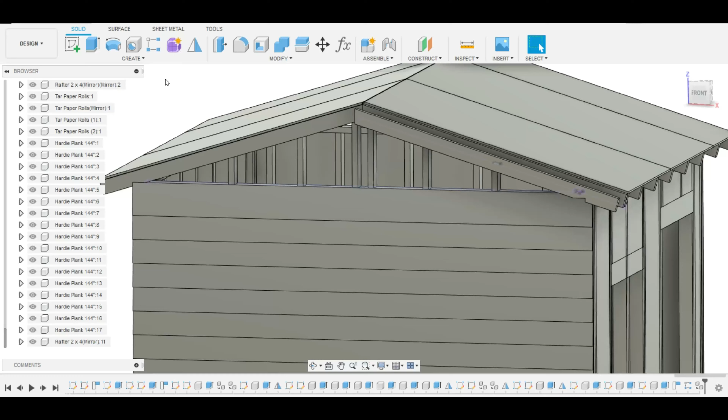Let's make a shop or shed, because why not?

All right, getting right into it. That is my parameters you just saw, and we should go back to them in a minute, I believe, on this first part one video.

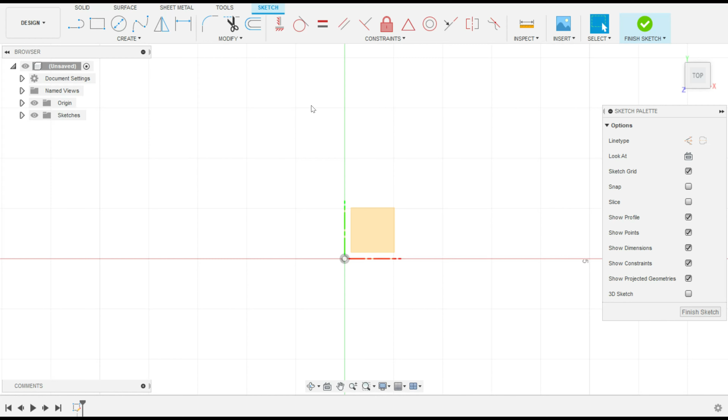You don't have to use parametric modeling. Again, I just find it to be helpful, and I think on this one I ended up not really using it to its full extent. I just didn't see the need for it because this was going to be a one-off. This was not going to be something that I needed to make several different types.

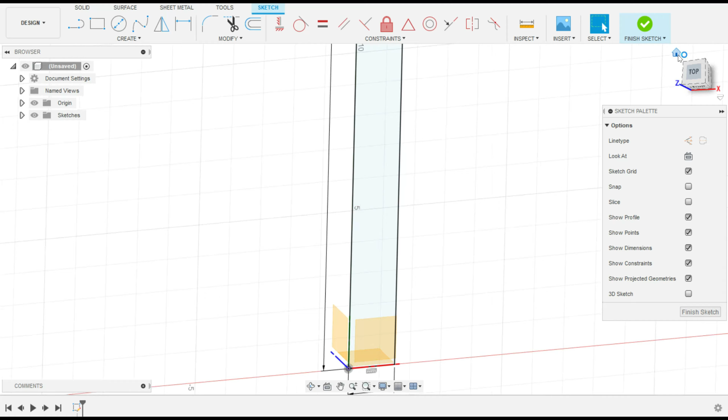But say you want to make some templates or drawings for people, you can do this with parametric modeling. And that way, if someone wants a 12 by 12 or 12 by 20 in lieu of a 10 by 10, 10 by 12, then you can easily adjust the parameters to change everything on the drawing.

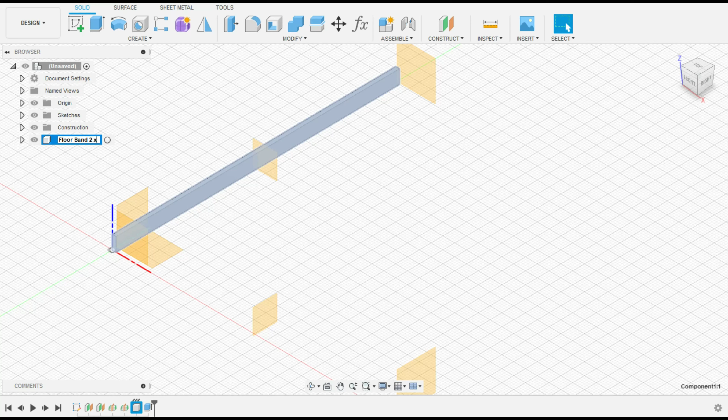But anyway, moving right into it, I do have a parameter set for concrete blocks for this one. I am not going to draw in. You can do like skids, 4x4 skids if you want, or you could pour a slab. I just, in my mind, would envision this having just some patio concrete blocks for this to set on. So that's why you're not really seeing anything but the 2x6 base.

Banding right here. So anyway, and you're going to want to use treated wood on this, if you're wondering. And because you can see on the left there, I'm actually spelling out the types of material.

And the reason I'm doing that is because whenever you go to print the drawings for this, and when you print out the material list, which it will do as well, obviously, in Fusion 360, you're going to want to know what that material was. Otherwise, it'll just say pier, or it'll just say band, floor band, instead of 2x6.

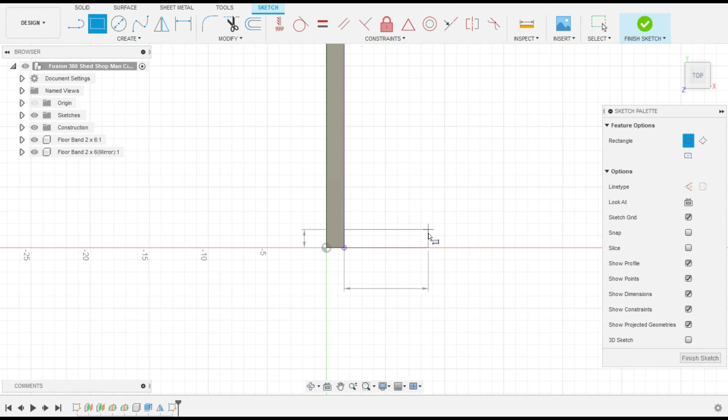So you ideally want to do that ahead. You can always change that later. It's not a big deal if you're in a rush. You can just shoot out components. As long as everything is a component and not a body, you'll be fine.

But anyway, this is kind of how I start off doing a shop or shed design. I start obviously with the bottom foundation for it, the floor joist, and move forward on it.

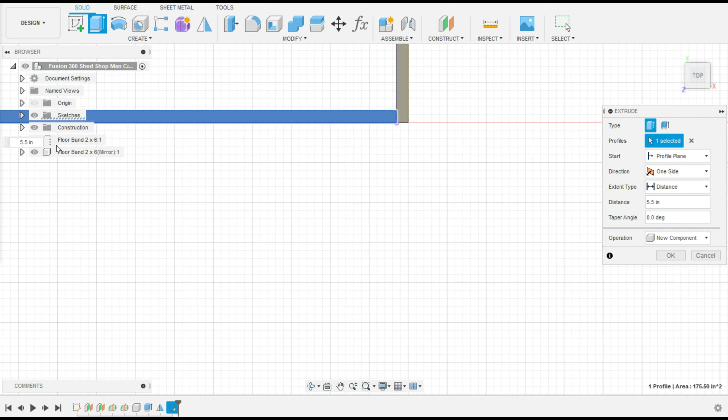Again, you're going to want to use your offset and midplanes through the construction tab, which you will see me do in just a second here. That way you can easily mirror any of the material.

And as you've seen before in my videos, when you mirror, as you'll see now as well, the component that was mirrored will simply show up as a mirror of the other item, as it should, and there you have it, and you'll see it on the material list the same way.

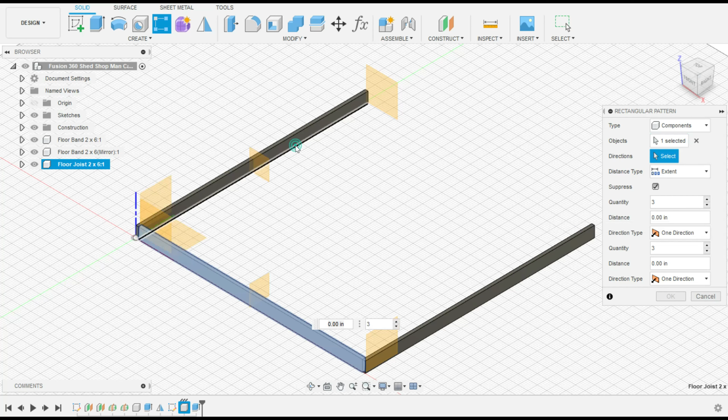That way you don't have to go back and name 60 joists. They'll individually populate on their own in Fusion 360 whenever you use the mirroring function, or when you do the pattern on path, pattern on rectangle, same thing, which is what you're seeing here.

And again, I don't do pattern on path unless I'm doing leatherworking. It's just a different technique that works better in leatherworking. In woodworking, I use the rectangular pattern.

And again, you just pick, as you saw, you pick the direction, and then you start picking the quantities that you feel you will need.

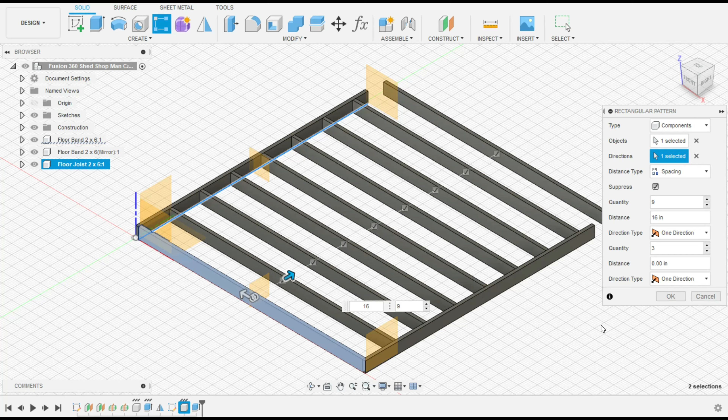Based on either spacing. In this case, I believe I was going to go with 16-inch on center, or you could do extent. Now, you'll see in a minute here, I'm going to switch over to extent in lieu of the spacing. And that just gives you the capability of adjusting or tweaking what you did.

So I have 16 on center, but when I switch over to extent, I'm going to be able to manipulate where these are a little bit easier. The problem with that is you're going to lose in this carpentry, you're going to lose the 16-inch on center.

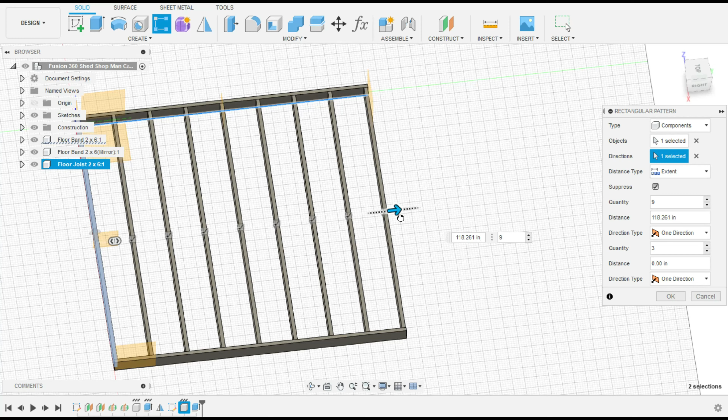So I think what I decided to do here is just add an entirely new 2x6 floor joist because I was starting to lose my 16-inch on center.

Yeah, and I guess I clipped that part of the video out, but I did go back and add that additional floor joist there at the end so I could maintain the 16-inch on center, which is not a big deal.

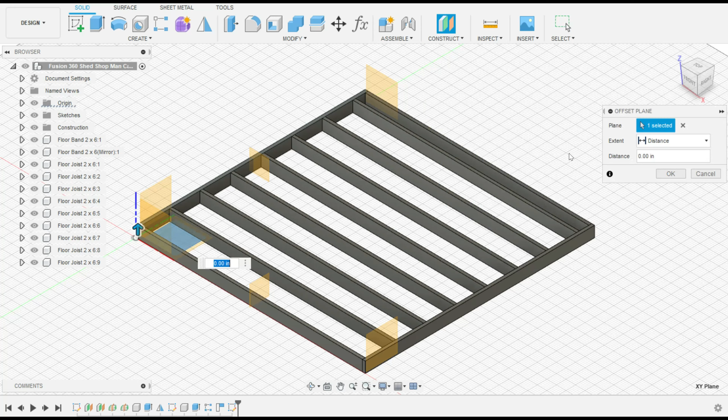I just wanted to get the quantity of lumber at the end where it needed to be, so I didn't want to be short 2x6s on this build, so I added one in there so that I would have the spacing that I needed no matter what.

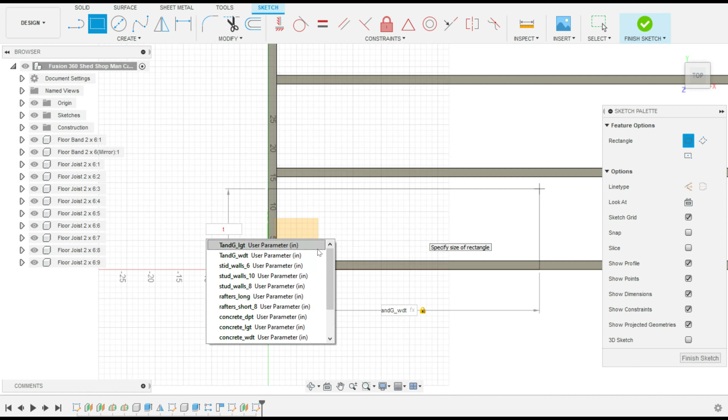So right here, I'm obviously putting in the subfloor, which is the 3/4 inch tongue and groove. And I believe I even spell out, yeah, tongue and groove.

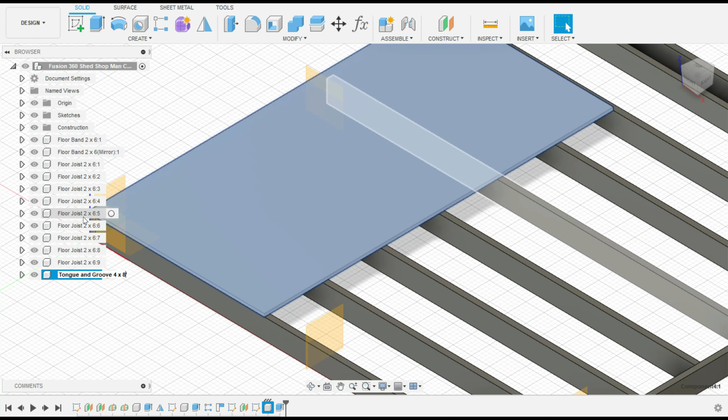Again, like I said earlier, you're really going to want to spell out the material. That way you know, or the customer knows, if you print off the material list and or drawings at the end, they're going to know that they need to get.

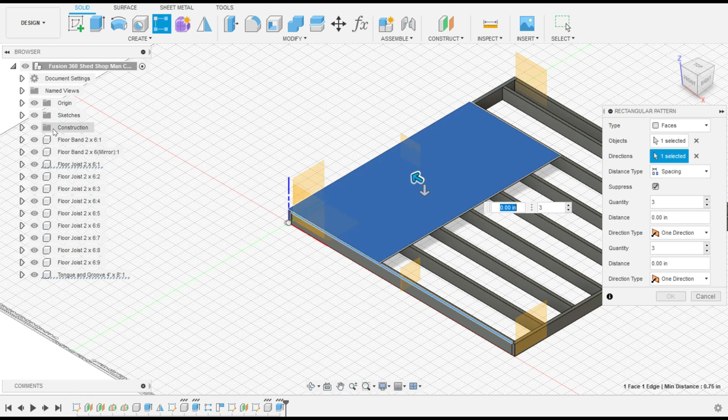Okay, for this, obviously you're not going to be able to get the full amount of 4x8s to span the entire floor joist here, which is what you're seeing.

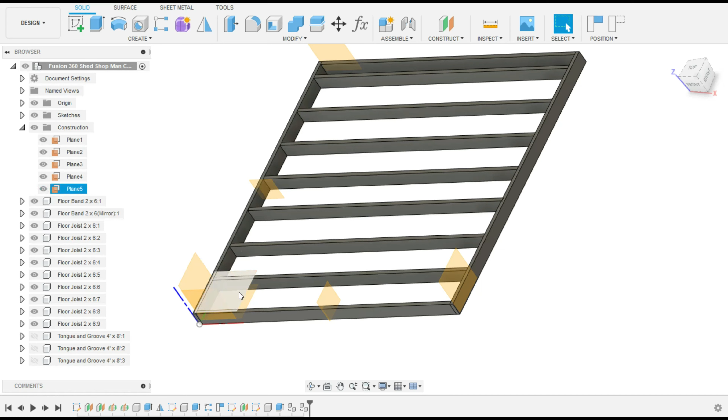So what you're going to want to do is get at least the coverage you need. That way, whenever the component is created on the left, you'll know that you still need to get an extra piece of 4x8 tongue and groove for that portion of the build.

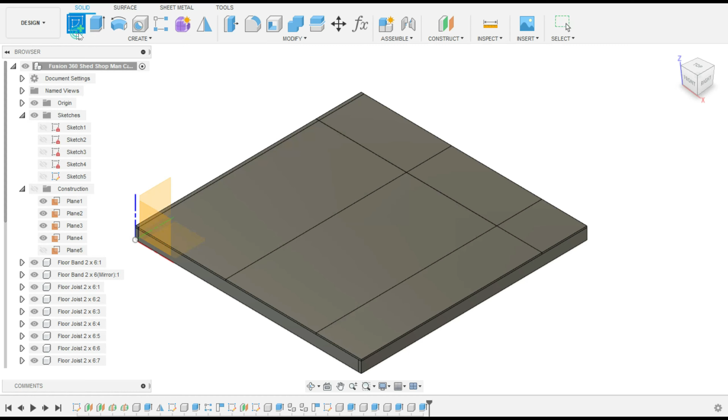Okay, once the subfloor is complete, you're going to want to start working on the wall studs. I did have a parametric setting for the studs, but I don't know that I stuck with it. I believe I went with 8-foot high walls on this one.

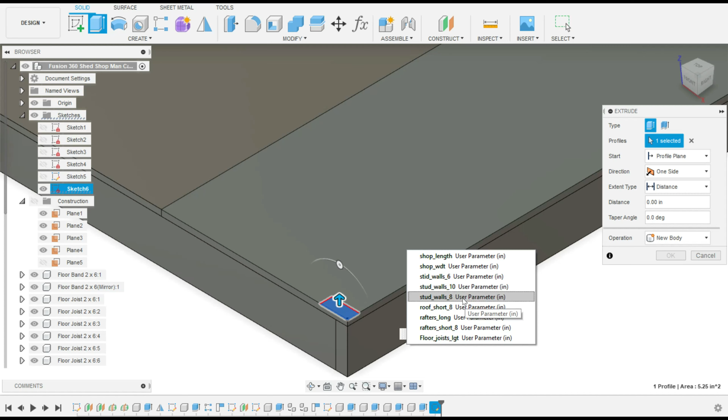I was going to go with a lean-to type shed because it's a lot simpler in the field building and designing, since you don't have to deal with a lot of the roofing, which can be tricky. But I made it more complicated and went with a pitched roof so you could apply composite shingles in lieu of maybe an R panel roof. It's more knowledge using Fusion 360 for the more complicated type of roof.

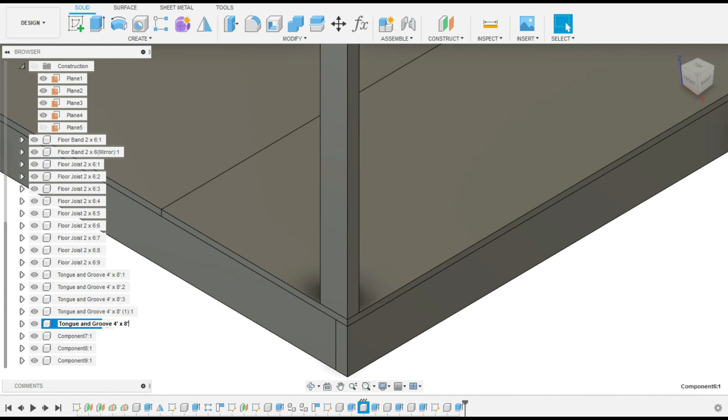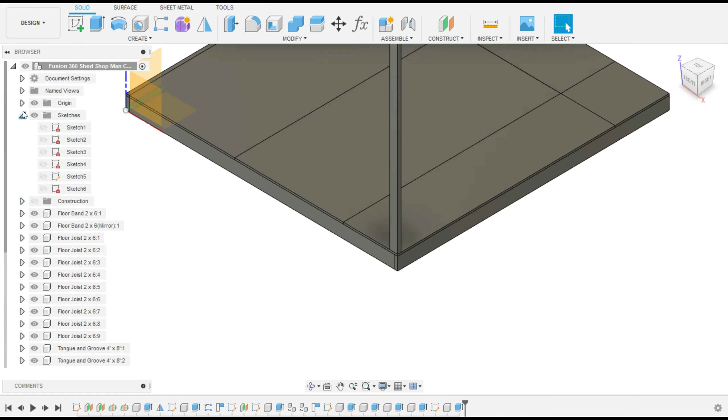So I'm laying out the studs here. You need to make sure that you are touching the top of the tongue and groove subfloor, because if you remove the components and hide them and work off the bottom sketch, your stud is going to start underneath where the 2x6 floor joists are, and you don't want that. You want it to start on top.

Something I didn't do here, which I didn't catch until later, is you actually need to put down a 2x4 bottom plate along the perimeter walls and then put the studs on top. I would probably go back and add those in, for sure, if I was going to sell this or give it to someone to build their own shed, because they need to know that you need the bottom plate, the horizontal 2x4 along the bottom of the wall studs, as well as the top header plate, which I did add. But if you don't have the bottom plate, it's kind of pointless.

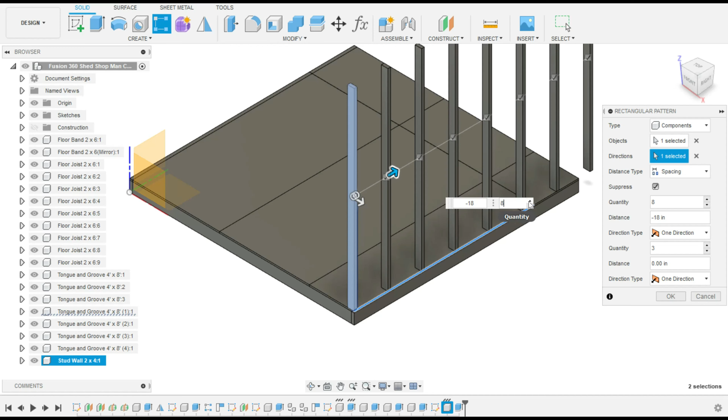So for those that watch this and see that I don't have that, I do know that. Given the amount of time to get these videos out, I wanted to keep moving forward and not go back and edit that particular item.

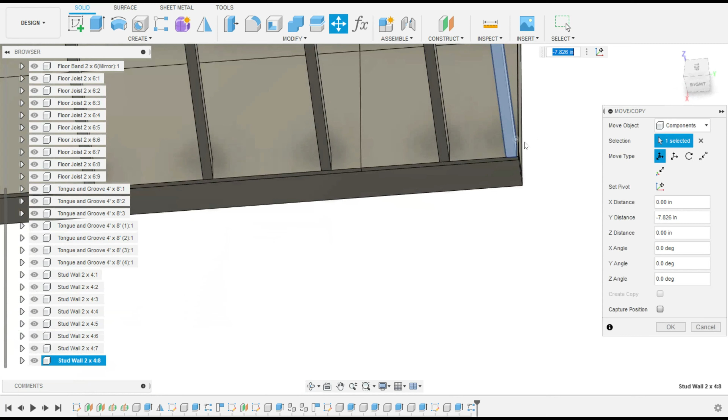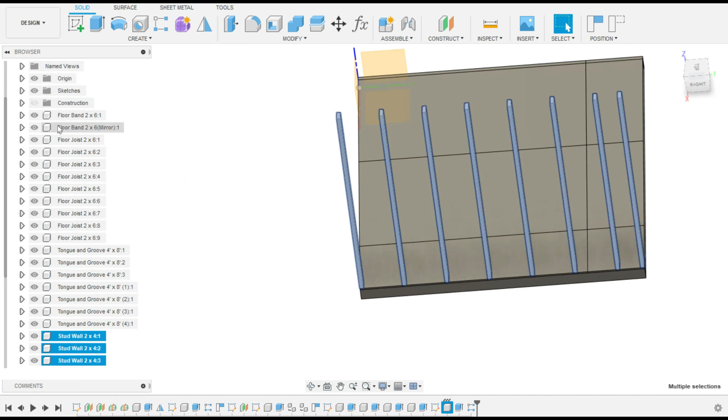But anyway, you can use a rectangular pattern to get these quickly out to the distance you want. Then once you're done using the spacing feature on rectangular pattern, you can switch it over to extent and tweak these around. Or you can individually click on, like I just did, the very last stud, right click if you're using a mouse, hold that component, then click to move it in place to where you want it to sit. So a lot of different ways to do that in Fusion 360.

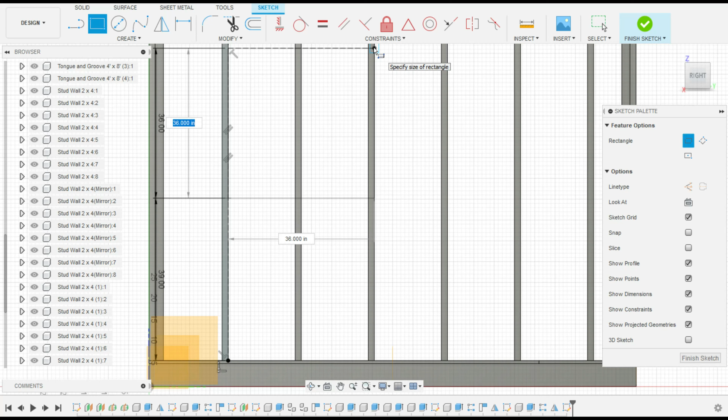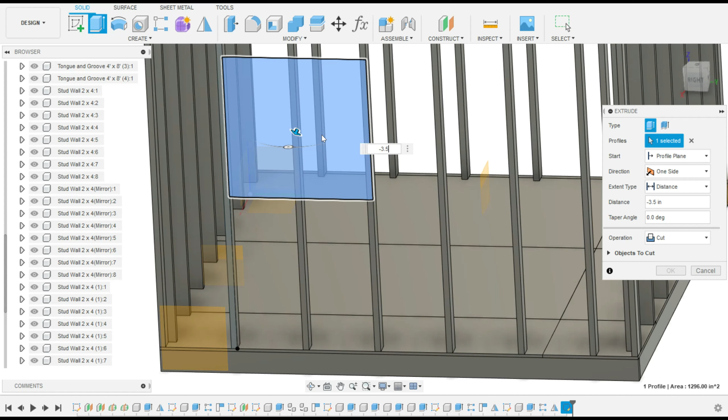What I'm doing here is just adding in where my window will go. This is also a good education for those wanting to learn Fusion 360, because if you remember, all of these were essentially mirrored or copied, so they all changed when I did my cut through for the window, which is exactly what you do not want because they're all tied together.

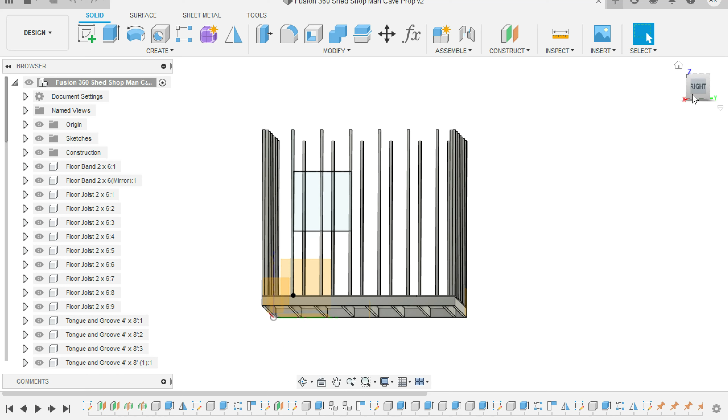Now, there probably is a way to isolate the components you want to work with. I don't remember how to do it, to be honest, and I haven't had to use it lately. For sure I have not. So there is a workaround, which I think is how I learned to do it, and I think a lot of people end up doing anyway, so I don't think there's a quicker fix in Fusion 360 that I know of.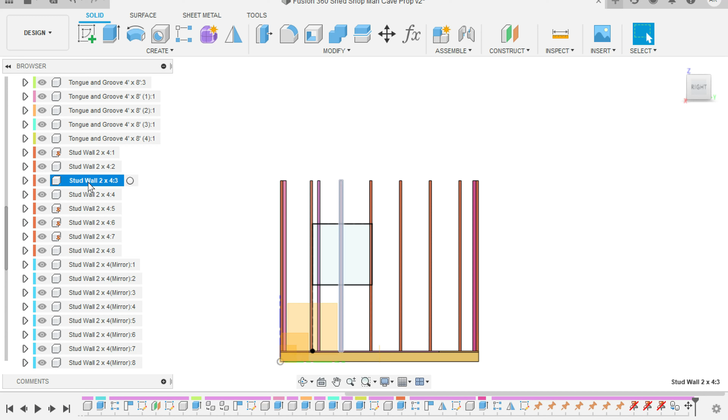You basically have to go in here and copy the studs, in this case where the window is going to be, create new ones, and then go back and hide the ones you don't need whenever you perform the cut. That way it isolates them a different way, so you can make the openings, the window and the door in this case, on this particular build.

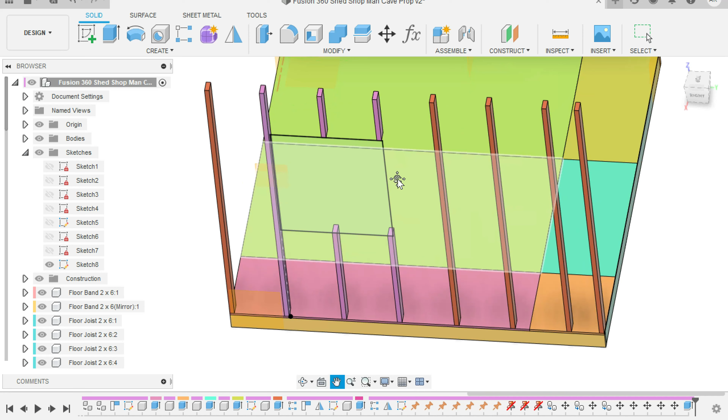So once that part is done, I know it's a lot. It's kind of a pain in the butt to use this technique, but again, I don't remember another way to do it. So this is how I did it, and you can go back and add more vertical studs in, which you're going to want to do for the support and jack studs and everything else, which I will show you, I believe, in part 2.

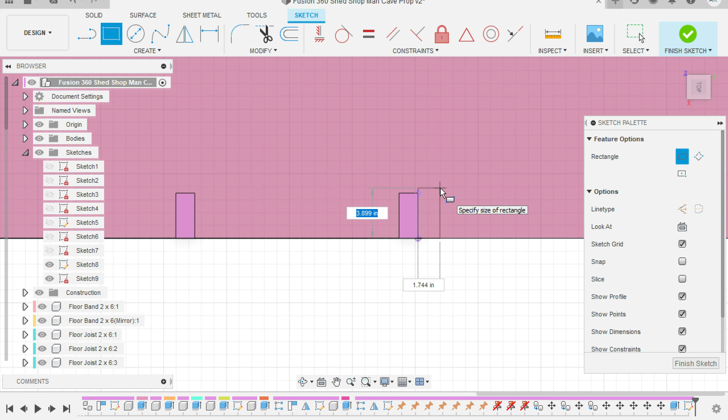I will finish off the window and add in the door and start working on the remaining framing, getting ready to put the roof on. And just so you know, I will show you how I do HardiePlank siding. I actually added that onto this one in lieu of doing a plywood wall on the outside and painting it, or something basic and boring. I added HardiePlank, so you'll see that lap siding as well up on a future video on this build.